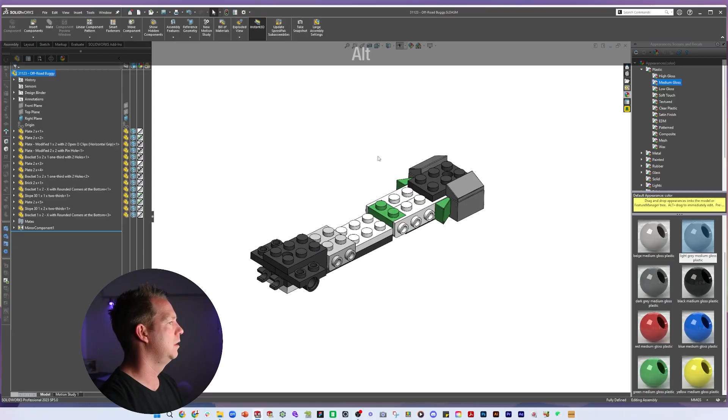Next steps. Okay, we have some duplicate parts again, and this new part, number 1, what is the name of that part going to be? A plate 1x8. Now we have plates here 2x. Let's do save as. I'm going to save as a copy and open it, and it's going to be plate 1x. So I've got those 2 parts.

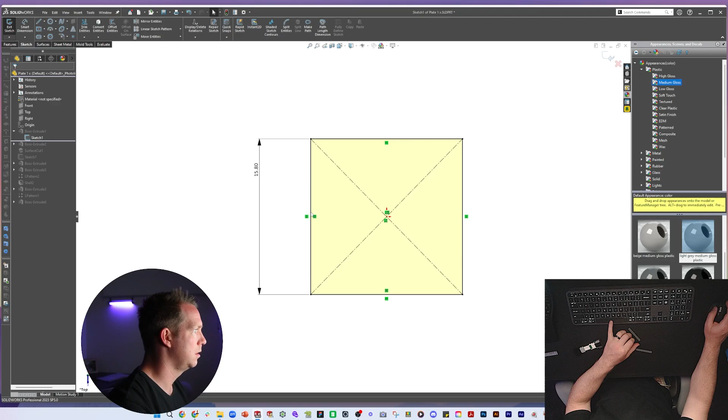Now, differences for this part compared to this one? Well, because it's only one width, it doesn't have these same circles. So we're going to have to change a few steps here. Let's go back to the default configuration and set things up a little bit differently. I'm going to roll through right from the start and have to change some of these. So it's no longer going to be equal. This will remain 15.8, but this one will be in half.

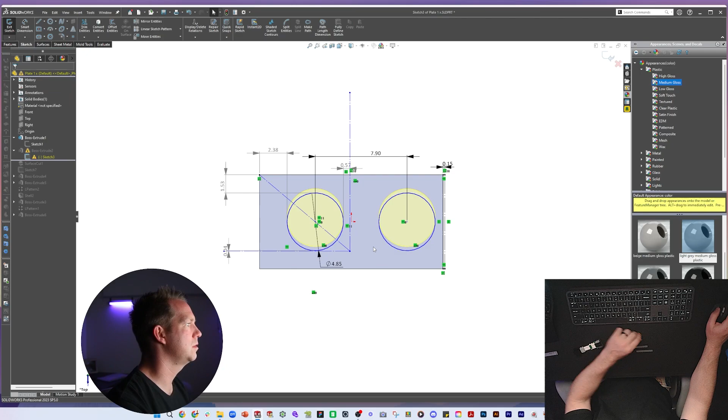Then these 2 dots, we will remove 2. We will remove this pattern. It will no longer be a pattern feature. In fact, of all the dimensions we've got here, the only thing we really need to keep is that this is horizontal. And if we put this on that midpoint, then we're good. Don't think we're using that anymore. That's okay. All right, that is our standard sort of 2.

If we roll down to the shell, it's then that this little step here changes. This is going to be 3.8, and then we're done. Okay, so that is our new brick, in this case, 1x2. Now we're going to have to rename our configurations. Can we rename them? No, not here. Can rename them here. 1x1, 1x3.

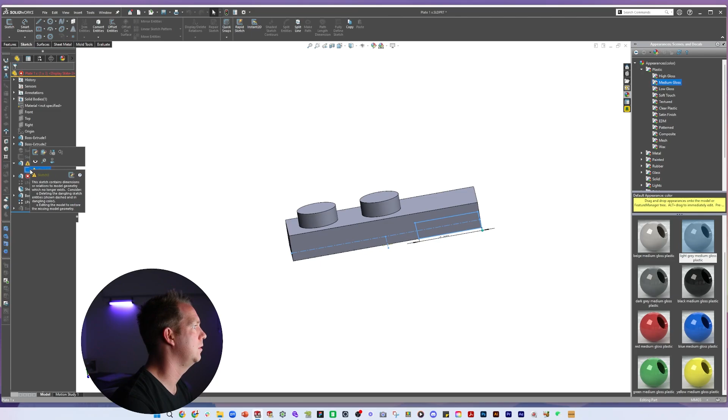All right. Let's go to the 1x3 option and have a look at what is changing. Our extrude, are there any errors here? No, that looks okay. This one, we don't need that. We do need this line. Then we'll go there. Let's fix this one. All right, what's going on? This is going to be equal.

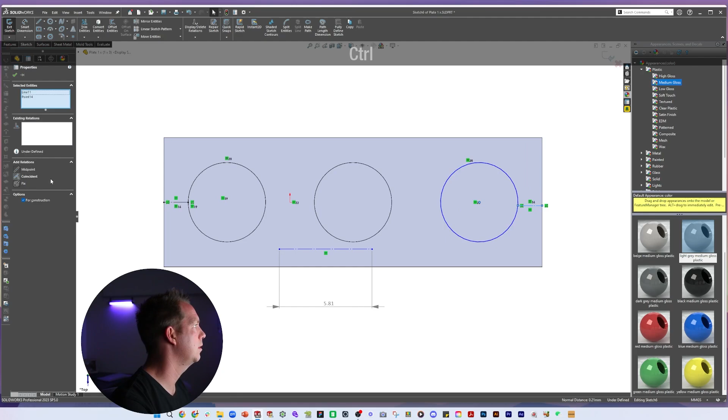That is going to be on that. Coincident. That is going to be horizontal. Tap on that. It's going to be horizontal. This one we don't need. Okay. Can I extrude up to top surface? Okay. That looks fine. Default. Okay. 1x1. Default. 1x3. 1x4. Okay. Well, we need 1x8. Great. So that part is done.

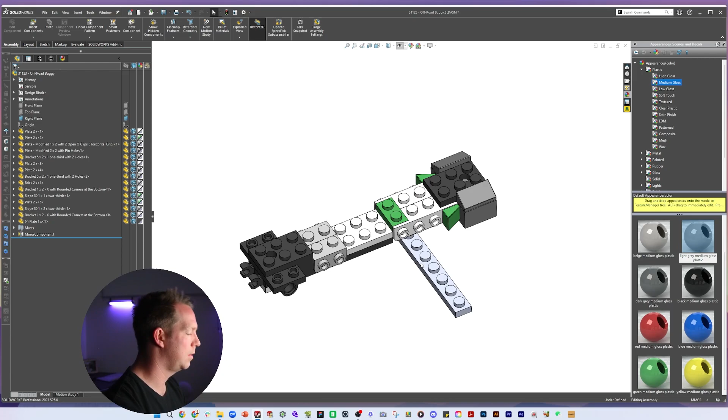Let's take that in. Now 1x plate in. Now what other parts do we need? I think we need one of these. Let's have a look at our assembly. So we're getting these green ones, green angled ones, and these grey ones. 2 of those, 1 of those times 2. I think they're going to duplicate this on the other side. Yeah, okay, so only 4.

I'm going to save a copy. Okay, so save this as a copy. We are going to go to the default configuration and we're going to make some changes. Now, the first change, if we have a look at this part, let's see if there's a 3D. No 3D. It's the same width and the same length, except it has a full round and it has holes that go all the way through.

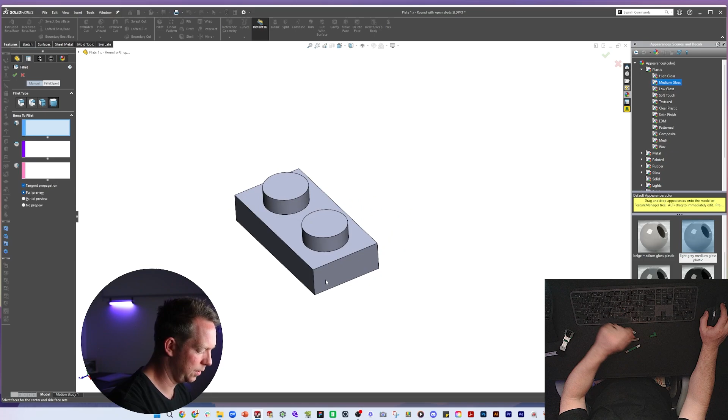So at this point here, what we're going to do is add in a full round fillet. So that's here, this last option under the fillets. Now for your selections, a trick I learned recently is when you're going through these 3 selections, click on your first one, and then with your right mouse button, it moves to the second selection box. You can select the next one. So you can very quickly get through all 3 selections to create your full round fillet.

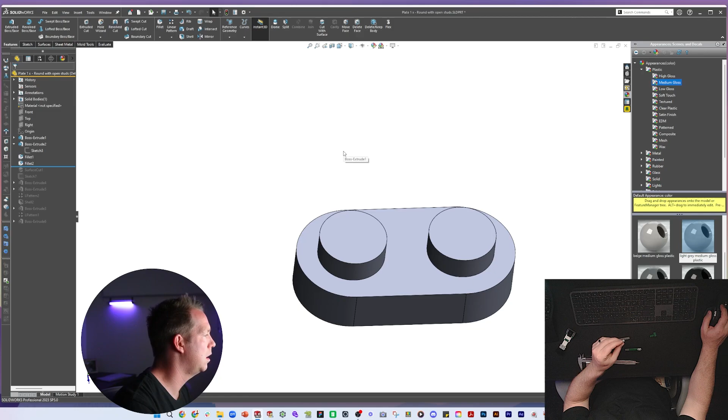And the one thing I want to check is that the dimension stays the same on the outside. I think it will. 15.8. Beautiful. Okay, so that part is good. And now our extrude on the top changes to one with a hole. But let's see if we can't change how that works with the shell feature. If we select shell, can we select these faces? Will that work for us?

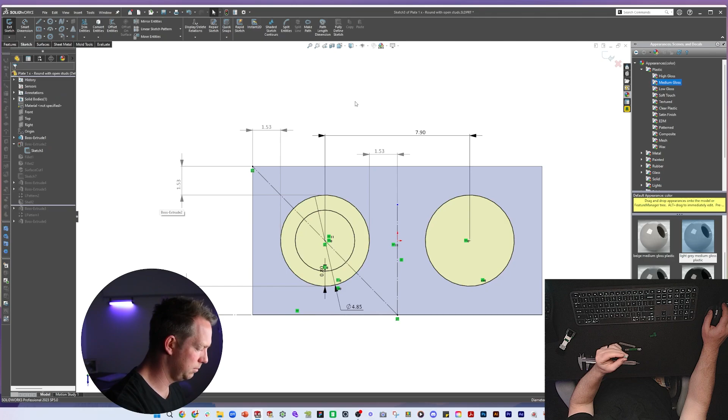I don't think so, because when the configuration changes and gets longer, we can't select multiple faces. So we can't do it that way. Instead, I do think we need to change it at the sketch level here. Now we need to put in another circle. Now that circle is measuring about 3.2. I think that's about right.

Yep, so that works. Let's mirror this one. Okay, and then what we'd be doing is cut. So this is a boss extrude for that, which stays the same.

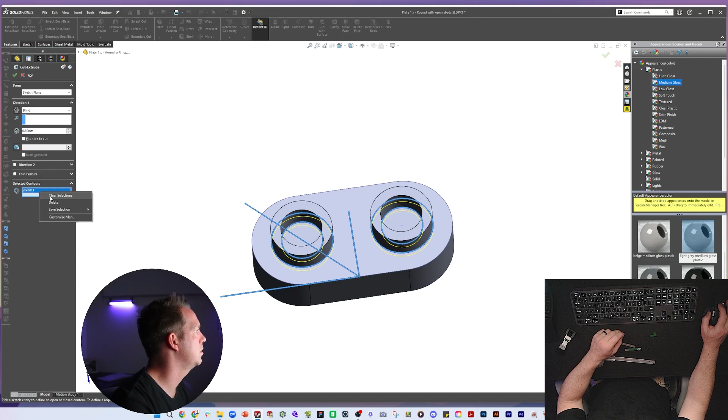But we now do a hole all the way through, which would be on this face using this sketch. We're going to select contours, select those two, and go through all to create that hole. Very neat.

Back into the assembly, insert this new part. We're just going to make these straight onto the main assembly where they go, so we'll build it up like the instructions suggest. Face on face here, coincident there, parallel there.

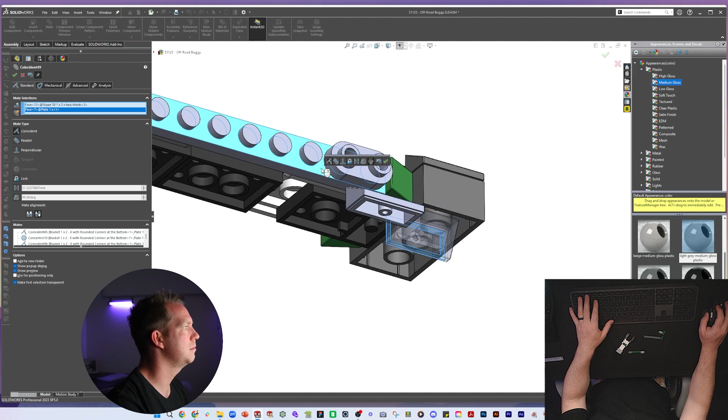Now we have a round one on the end, and then these sloped ones next to them. Cool, is that right? Yep, that looks right.

Let's add our colors, so it's dark gray, light gray, and 2 green. So we got dark gray here. I think I copied the wrong one. Copy, paste. Light gray is this one, and then green is for these two.

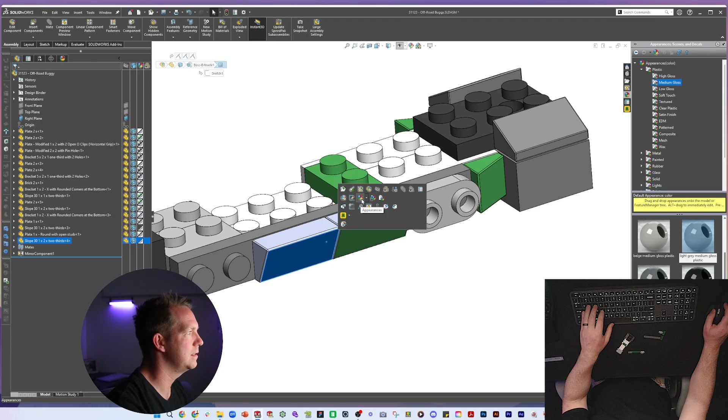Now, if I was to try and paste at the same time, then it's just pasting on the faces, all right? That's why I can't really do that. There is a way to do multiple parts at one time. I can show you that right now.

So if I was to edit this material on that component, in my selection toolbar over on the left, I can actually select other components and it will add green to all of them at the same time. So maybe from here on out, we'll do that at the end rather than one at a time.

All right, looking great. Let's close that tab and come back to our assembly. Our next step is to mirror that to the other side. Select those parts, press OK. We'll go through and I'll do that bulk material apply later on.

Assembly's starting to come along. Okay, we're up to step 14, another new component. Everything's nearly new. Okay, number 14. This part is a bracket, 1x2, 1x2 inverted.

So it's pretty much the same as what we've seen with this one, just the other way around, inverted. Can we do it in the same configuration? I don't see why not. Let's try a derived configuration.

Derived configuration is the next level down in configurations, which means I'd use this configuration, but I'd have configurations under this level. It's like Inception, going extra deep. One thing with derived configurations is all of them still require unique names, even though it's under another one.

So as much as I just want to say inverted, there's an option here, I can't do that. I have to go 1x2 inverted as my configuration name.

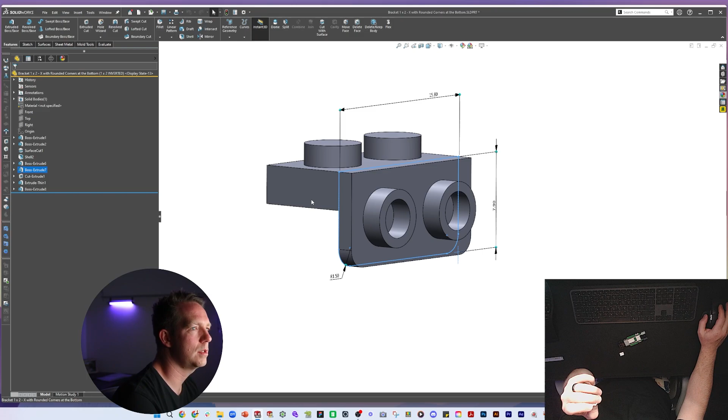And now what I'm going to try, we'll see if we can do this so that it's consistent across them, across multiple configurations, because it's really just a mirror. I'm actually going to try to do that, but we don't want a mirror. We don't want to duplicate. We actually want to flip.

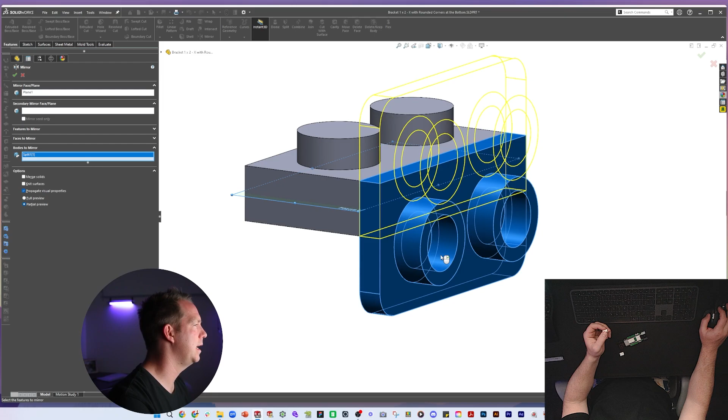And so to flip, what I'm going to do is cut the body so it's separated. I'm going to put a plane in between those faces. That's our flipping face. I'm going to select mirror, select the plane, select the body to mirror. Now it is duplicating, but we can then combine them together and then do a keep body on that one, and we're done. And now if we go back to the original, it's here.

And I suspect we'd be able to do the same with the 1x4 option as well. So if I want to go add a derived configuration here, which is 1x4 inverted, all I have to do, if this works, you'll see. But unsuppress, there you go, it's done. Pretty neat, hey? I really like that one.

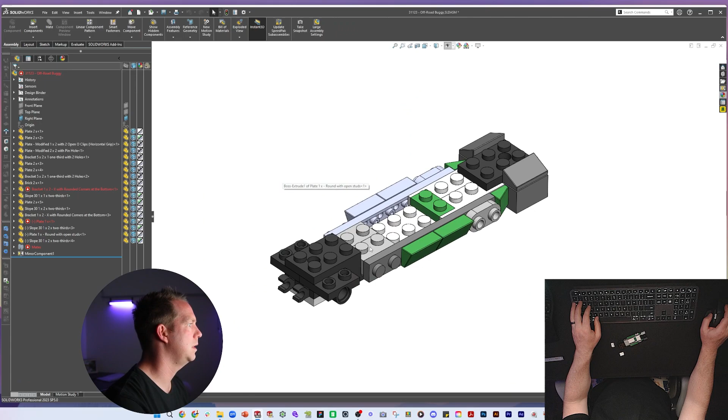So, fantastic, we can do bracket 1x2. Now, what's happened here? A mate issue between these two parts. What is the mate issue, I wonder? It doesn't like that concentric mate anymore because the face has changed, it says.

I don't think it has. Bit of a weird error there. All right, so where is this part assembled? On the top, and they're white in color.

So I'm just going to make a duplicate of that. I'm going to go to the inverted configuration and I'm going to mate it on top. Faces to mate here, this one and this one. And then just going to isolate two bodies and mate these two faces. All right, once again, add it to the mirror.